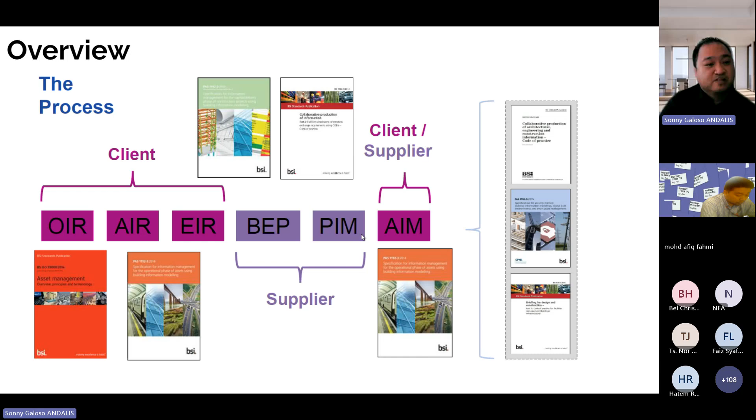So what I'm trying to say is that the client produces the following: the organization information requirements, the asset information requirements, and the EIR, the employer or exchange information requirement. If you look at BS 1192, it was called employer - the E stands for employer - but if you read the ISO 19650, the E stands for exchange. So you have to be careful about that, but they are interchangeable - it means the same thing.

So the consultants respond by creating a BIM execution plan if it's under BIM standards, a VDC execution plan if it's under VDC, or a digital delivery plan, a DDP, if it's under IDD standards. And you produce, as mentioned, the project information models and the asset information models. So that's basically the overview.

So what I'm trying to tell you, to get the gist of it, is the EIR is simply the tender specifications. And a BIM execution plan, or VDC execution plan, or digital delivery plan, is basically like a method statement - it explains how you are going to deliver a particular project specifically for a client's EIR.

The same is true for the asset information model. The actual deliverable is COBie or AIM or Asset Data Dictionary. COBie stands for Construction Operation Building Information Exchange. This is basically like a method statement - so it's a deliverable. That's the simple definition of the difference between an EIR and a BEP.

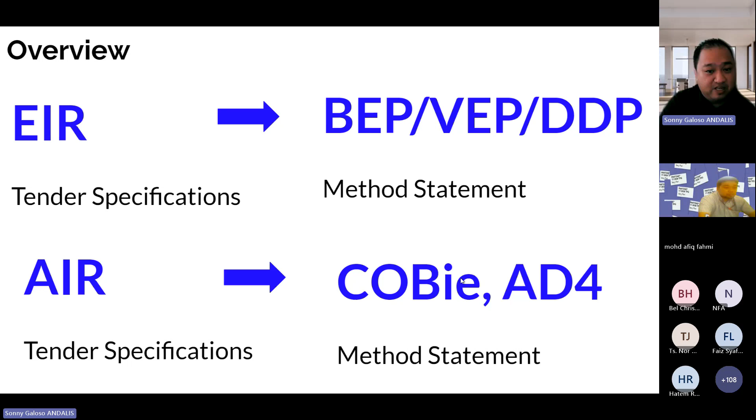So let's start - I have started the discussion to have a few definitions. The building information model or BIM, you have virtual design and construction, virtual building environment. And recently, if you read a few EIRs, they will talk about digital construction or integrated digital engineering - a lot of buzzwords.

But basically, the BEP is to demonstrate that the project stakeholders propose the approach, the capability, the capacity, and the competence to meet the EIR. That's all actually. It is assessed prior to the appointment of the project stakeholder, so even before you start the job, you have to submit your method statement.

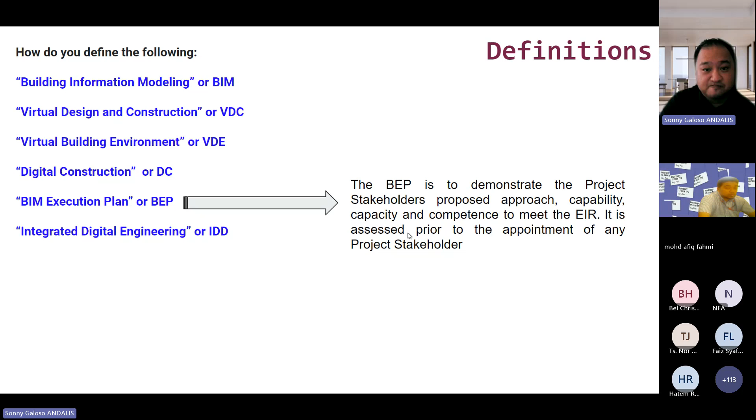That's all actually. So let's talk about BIM, building information model. So if you submit a BIM execution plan, what is expected of you - these are the skill sets. So the common ones are 3D modeling, 4D, 5D, model federation, clash check, and authority submission. So a BIM execution plan requires specific skill sets from the consultant, from the contractor, from the client or developer.

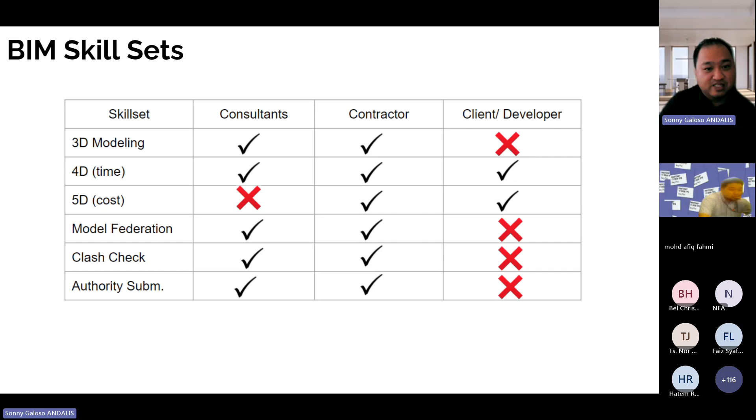Even the client and the developer must be able to demonstrate that they will be able to understand and use the models that you have prepared, or the BIM use case that you are proposing. Because there's no point creating something that nobody is actually using - it would be a white elephant.

These are basic, or ICE meetings, attended by engineers, architects, basically those people who have the capability to make decisions. You have virtual design models and virtual construction models, and discipline-specific information requirements. You have BIM to field, generative BIM or computational BIM, and as-built models.

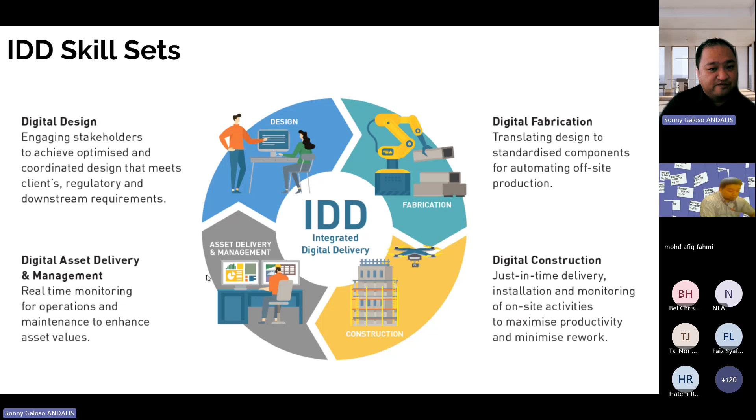When we talk about IDD, I think that's common in the market now. You have digital design, digital fabrication, digital construction, and digital asset delivery. You can read that on your own time, you'll have the slides. But what we're trying to do here is that IDD is actually a bit more complicated. These are the specific IDD skill sets, and if you notice, it's actually very different from the VDC skill set or the BIM skill sets.

You have digital design, which refers to the project information model, and digital fabrication, which the consultants and the contractor need to do. Common data environment, or CDE, is common now. You also have drones and laser scan.

This is actually to have a record of what is actually built on site. You have generative BIM and as-built BIM, which is the asset information model. You have standards where you can look at whether it's PAS, BS standards, or ISO. You have robotics now, which is quite a new thing—even in Singapore standards we're now starting to have that. You have digital asset, which is COBie. COBie is nothing new, but these are the general IDD skill sets to have.

I need to do that introduction for you to understand what exactly is a BIM execution plan. In reality, the BIM execution plan is an old, 10-year-old standard. This is already 2024, right? In Singapore, we started doing that in 2010, so it's about 14 years old already. So if you still call it a BIM execution plan, it's actually the very, very old one.

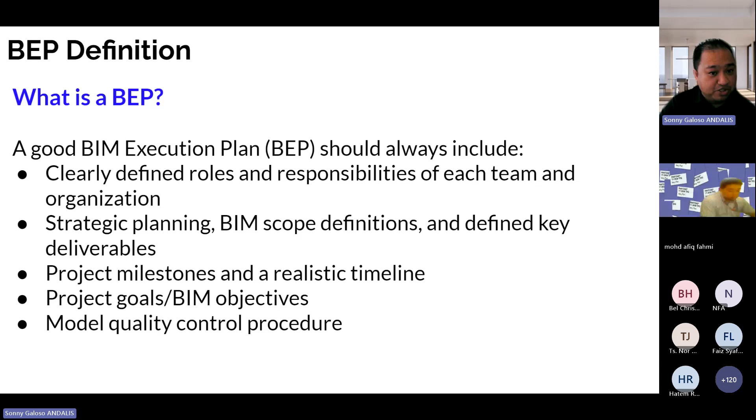It has to have clearly defined roles and responsibilities. You have to have strategic planning—what are you going to do across the number of years of your project, whether at the design stage, construction stage, or operation and maintenance. It must have key deliverables, project milestones and realistic timelines, project goals and BIM objectives, and model quality and control procedures. So these are common, these are the must-haves.

It also has PLQs. What do I mean by that? These are basically plain language questions. There's a tendency, if you are in BIM, to have a lot of acronyms. So the idea of a plain language question is to ask a question that is in plain language, with no acronym or whatever.

So you, as a BIM manager or as a client or as an engineer or an architect working on a project that has a BIM component, it asks you what steps to take to start a BIM project. That's a very simple, plain language question.

If not requesting all participants to migrate to BIM, what migration strategy would help you bring about that change? That's a very specific question. Let's say the main architect and the engineers are in BIM, but how about the specialist contractors—are they required to be on BIM as well, or can they do CAD as a specialist? So you focus on specific disciplines. What should be the aim of that specific single discipline?

There are projects wherein you are not talking about discipline anymore, you are talking about discipline groups. In one of my projects, we actually grouped one CSA—civil, structural, and architecture. Actually, the CSA, civil, structure, and architecture, is one group. We call it a discipline group, not more. It is actually a combination of three disciplines.

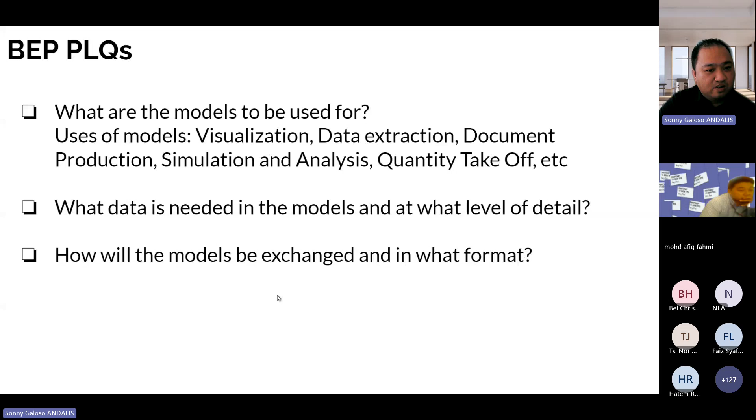You also have who is managing the project, the location of the project team participants, because on some big multinational projects, the scope of work—for example for the architects—they may be co-located elsewhere. They may be in the UK or the US. Your structural team is in Spain or Hong Kong, and your mechanical team is actually dispersed in the Middle East. So it depends.

If a particular company has a global design center, this can be a big problem. What risks are involved? So what I'm trying to say is that there's a specific need to write a BIM execution plan.

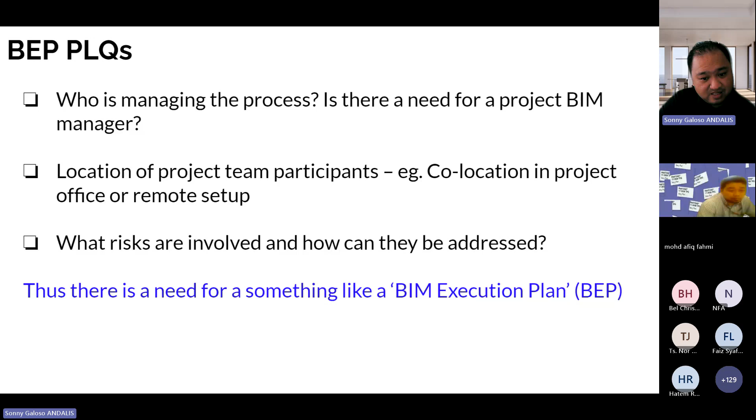These are the early adopters I mentioned about, basically from the US—obviously Indiana University and the Los Angeles colleges. These execution plans, if you notice, are from 2009 and 2010. They are the first adopters of what a BIM execution plan is.

If you actually look at this early BIM execution plan, you would understand that there's a proposed strategy. Strategy is very, very important in utilizing BIM during the design stage. And then the second purpose of this execution plan is what is the strategy during the construction stage?

So you have obviously a design stage. This can be in terms of months or even years. In my project currently, we are designing it for the last 4 years, still designing it—we are still at the design stage. Construction stage is obviously very long.

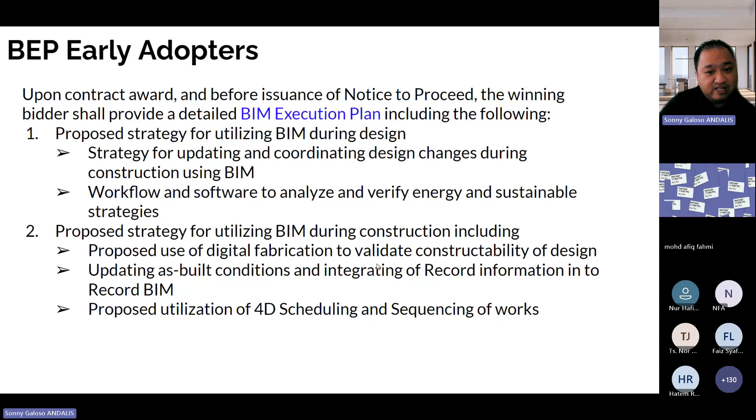So the version of the software and the file formats are changing. You may have started in Revit 2020, but now it's 2024. Are you using still version 2020 or are you using version 2024? So what is your strategy? What is your soft landings? These are the things, these are the questions that you need to answer.

I mentioned about the software to be used, the file formats, the exchange protocol—we will discuss that in detail later—and the project team qualifications. And then, is it specific?

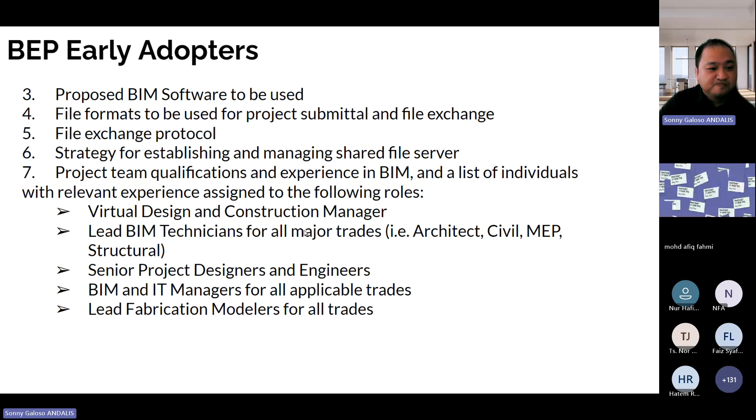This particular question is US specific. They're talking about virtual design and construction manager. In the US, there's a difference between virtual design manager and virtual construction manager. So there's a big difference with the VDC workflow as compared to the Asian BIM execution plan. This is basically what the early adopters are talking about.

The next one to discuss is roles and responsibilities. This is a sample of our roles and responsibilities. This is normally done on a table or an Excel spreadsheet. If you actually go to the early adopters in 2009 and 2010, you would actually see this.

We are still doing this actually, even if you have a VDC or an IPD project. We are still producing roles and responsibilities because it is actually necessary to see who is doing what and who is supposed to create and generate what kind of documents or models for a specific project.

You have milestones as well and deliverables. If you notice, there's a conceptualization stage, schematic stage, design development, all the way to construction document. Even in 2009 and 2010, at the DD stage or design development stage, you have architectural model, energy model, structural models, cost estimate, and a discipline collision report.

There's even COBie, which is actually quite popular in the US since 2010. COBie is basically a data exchange format between the modeling stage and the facility management stage. That's quite important especially if you are doing government buildings in the US.

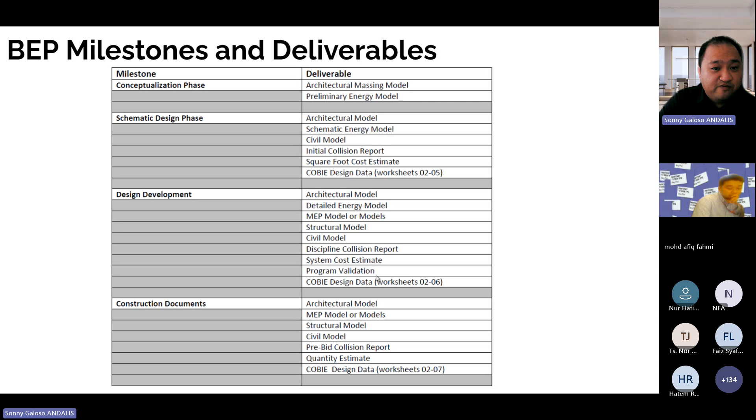So these are the deliverables if you are actually creating a BIM execution plan in the early 2010s.

So I mentioned about mandatory contents. When you talk about BIM execution plan, the mandatory contents, there are only 5. Number 1, you have a project initiation and description. You have to have a modeling plan. You have to have an analysis plan.

Actually, a lot of people are deleting the analysis plan, just jumping to collaboration. But analysis is actually quite interesting—the engineers and architects must be using the models for analysis. There's also a collaboration plan and a quality control plan. So these are the mandatory components if you are implementing a BIM execution plan.

What do you mean by that? So how about project information? You have the owner, the project name, the location and address, and the description. Then as part of that, you discuss the goals—review, decision support, analysis, coordination, clash detection, and QA/QC.

So these are the modeling goals—what are you going to use the model for? This is the first important component if you are creating a BIM execution plan.

The project goals, if you go by this—these are the common ones—is to have a fully coordinated and assembled model. You have separate models in the original authoring software. You have project data, whether schedules, drawings, or facility management data under COBie, and your 2D deliverables, whether proprietary like DWG or DGN, or neutral like PDF.

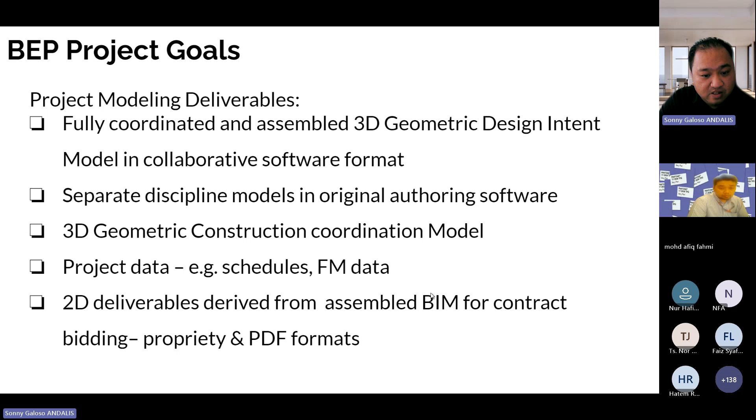So these are considered lightweight files. And then you need to have the project uses of your BIM at the plan, design, construct, and operation stage. These are typical ones.

As mentioned, this is the project goals even before creating BIM execution plans in the early 2010s. So you have your existing conditions modeling. Now there's a lot of emphasis on laser scanning and point clouds. Before, the existing conditions modeling was done manually, but now you have laser scanners to import point clouds there.

And then you have your analysis, whether structural, lighting, mechanical, and other. This is LEED—in the Singapore context, we have Green Mark. I don't know about Malaysia. And then we have code validation.

If you have heard, in Singapore we are transitioning to model-based code checking, so we are reviewing models without people there—they're actually reviewed by computer programs. And then you go all the way to record models, which is the as-built models, and so on and so forth.

So what I'm trying to emphasize here, for example in the operation stage, is that if you are creating models specifically to be given to the client or the developer or whoever will be managing the project, it is very important to focus on asset management.

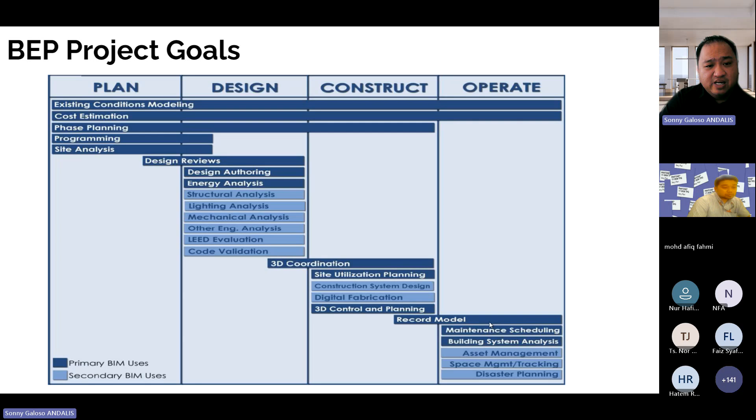Project goals—so I mentioned one of the BIM execution plan project goals is to identify the value and risk for each of the BIM uses, whether high, medium, or low. You identify the responsible parties, the rate, and the capabilities of each party. This is important in terms of resources, competency, and experience.

So in our projects, when we review BIM execution plans, we actually grade them depending on their competency and experience, because a lot of projects are not similar. So every project is different.

So you have to grade and assess their capability in terms of this—for each BIM use, rate their capabilities for each particular BIM use.

In terms of project team, whether it's a small project or a big project, you always have BIM managers, or in the current context, digital delivery managers. You also have coordinators between disciplines, and you also have modelers. So it's important to actually put in the responsibilities of each of them.

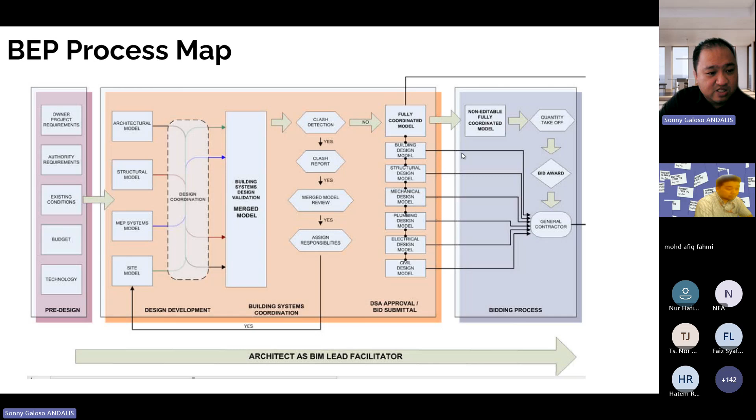So you have specific models. What are they going to be? How are they going to be federated? And who will be doing the quality assurance and quality control? These are specifically process maps required in a BIM execution plan.

This is just a continuation—this is the left side, under design. During construction it's much more complicated because you need to provide models coming from subcontractors and then federate or consolidate them. A consolidated model is the same as a federated model.

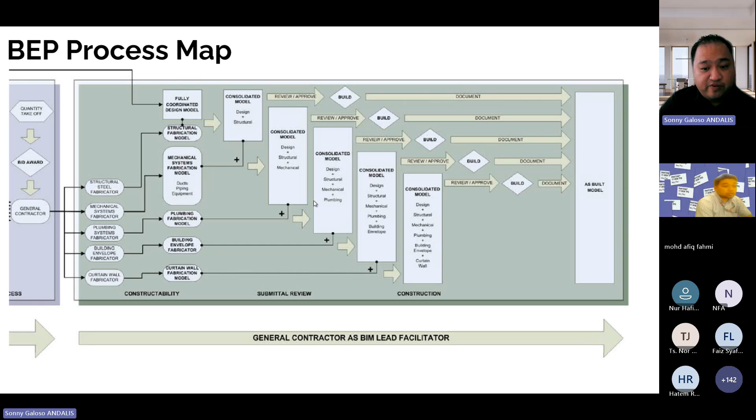How are you going to federate that for submission to the client, for submission to the authority, and for submission to the engineers and architects? You have to be very specific on how you are going to federate or combine your models. This is another example of a process map, quite old already, but this is from the initial stages of BIM execution plans in the early 2010s.

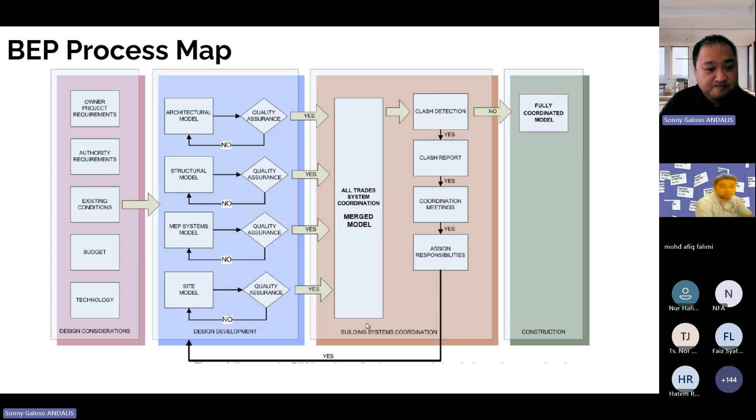Another important feature of a BIM execution plan is your modeling plan. For example, the architect, the civil engineer, the structural engineer, the mechanical engineer—what exactly are they going to do, and what particular authoring software are they going to use? That is important.

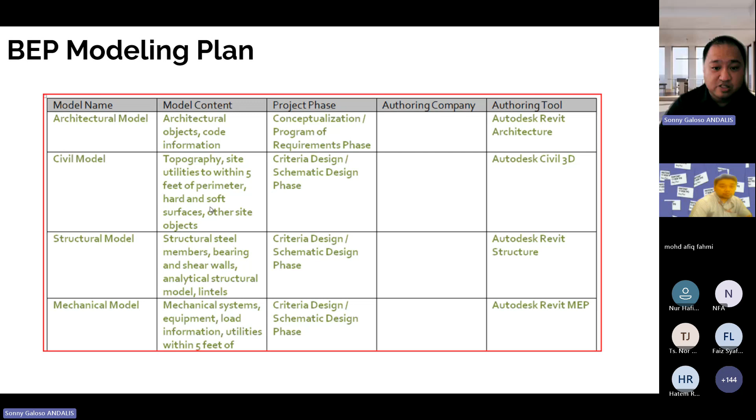In the Singapore context, this was actually published in 2010, so it's quite old. At the time, we required site models, architectural elements from the architectural models, structural elements with load-bearing elements like foundation, beams, columns, and so on, and civil elements.

At the early stages of BIM execution plans, from the early 2010s to 2015, you have digital terrain models, required to see the existing condition. You have geology reports—even at the time we were doing AGS format already. You can import that into Seequent, gINT, or Civil 3D. You also have utilities models.

Rain and stormwater—this is actually specific for infrastructure projects. You have underground public utilities and others. So this was quite common already in the early 2010s, in most BIM execution plans.

If you notice, there's a distinct difference between a building project and an infrastructure project. A building project has the typical architectural, structural, and mechanical BIM elements. An infrastructure project has a lot more civil BIM elements—not quite common, but very necessary for infrastructure projects—and you must have the capability to model them in 3D.

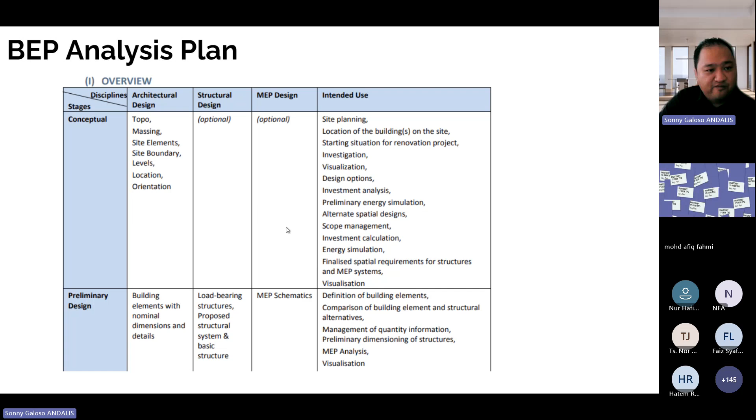Going down to the project stages—detailed design, construction, and as-built—you would have another form of this, a table for your analysis plan, specifying what you are going to use it for. That is a typical one.

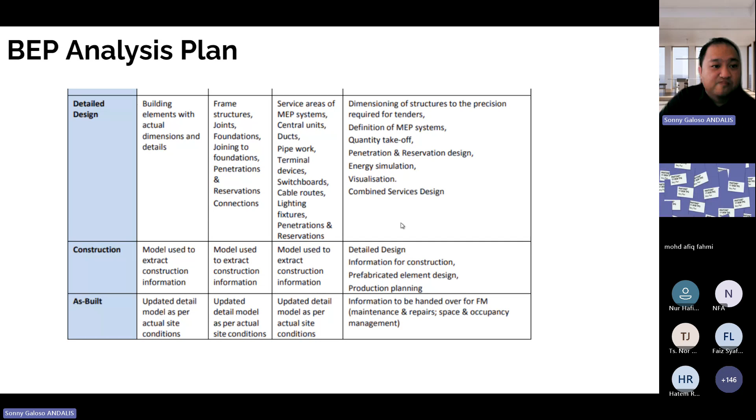How often? Is it weekly, fortnightly, or monthly? It depends on the project, on the complexity of the project. You also have your information exchange. I will discuss this later with an example, but this is basically what the architect produces and how the structural engineer will consume it, or how the mechanical engineer will consume, for example, the structural models. So you have to be very specific on that.

And then it comes with quality assurance and quality control. You have four different types. The first one is a visual check - most BIM managers will do a visual check. You have an interference check between two components, whether they're clashing, soft or hard - that's called an interference check. You have a standards check - basically, is it following a particular standard? Your dimensions, your line style, your levels, your layers, and so on. And then your model integrity check.

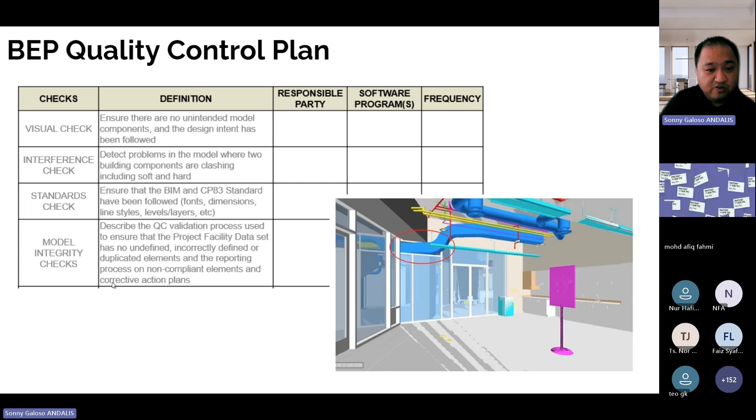Recently in Singapore, as mentioned, we are in the process of migrating to CoreNetX, wherein the validation of models is done by computers. So in the Singapore context this will be fully automated, but in other parts of Asia, for example, this is still actually done manually.

So I mentioned about the must-have and optional items for the BIM execution plan. I would like to give you best practices from the projects that we have done for quite some time, for the last 10 years. I mentioned about identifying BIM goals and uses.

This should be attended by your senior management and BIM management staff, including the owner, the designer, the contractors, and the key subcontractors. You have a design BIM execution plan, attended by the owner, the BIM managers, and the project managers of the project. And then you have to develop your information exchanges, and you have to review your final BIM execution plan, and it has to be attended by all parties that are involved.

Another best practice is monitoring progress against the BIM execution plan. For example, on a monthly basis, we discuss the progress of the project and address any implementation challenges. I have to note that a BIM execution plan is not a fixed document. On some of our projects, we actually edit the BIM execution plan on a monthly basis.

We resubmit it because it's a method statement, right? And if the method statement is not workable, we have to tell the client or the architect or the engineer that we will do it differently the following week, the following month, for example. So it's not a fixed document - you have to continuously modify it, as mentioned.

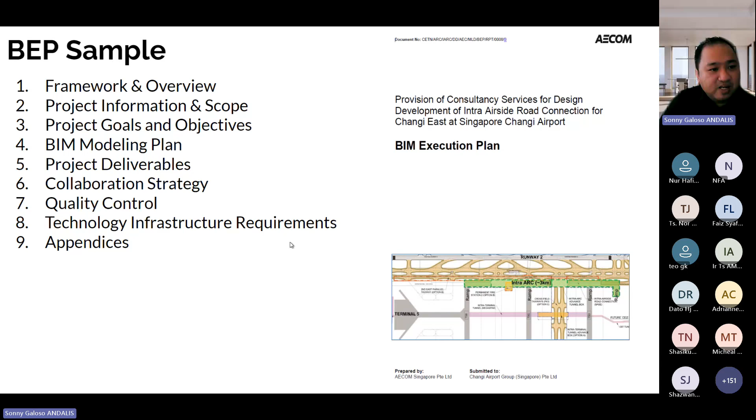So these are the typical components of a BIM execution plan. That's basically the end of the BIM execution plan.

I will be discussing the employer or exchange information requirements, because this affects the BIM execution plan. If you notice, with the publication of BS 1192, the British Standard 1192, and then ISO 19650, the BIM execution plan actually changes now. That's why the topic of this presentation is the evolution, because the EIR is responsible for that change.

So let's discuss exactly what an EIR is. An EIR is simply an employer's information requirement or an exchange information requirement that forms part of the appointment and tender documents on a BIM project, to enable the supplier - the consultants or the contractor, as I mentioned - to produce their initial BIM execution plan.

There are a lot of updates now on what an EIR is. EIR can sometimes be very, very thick - I've seen an EIR that was about 550 pages long. So the BIM execution plan also changes. As mentioned, the BIM execution plan is just a method statement generated in response to the employer information requirements or exchange information requirements. It's a pre-tender document that sets out the information to be delivered, the standards and processes the supplier should adopt during the project delivery process. This is the main reason why BIM execution plans are evolving, because the EIR is also evolving.

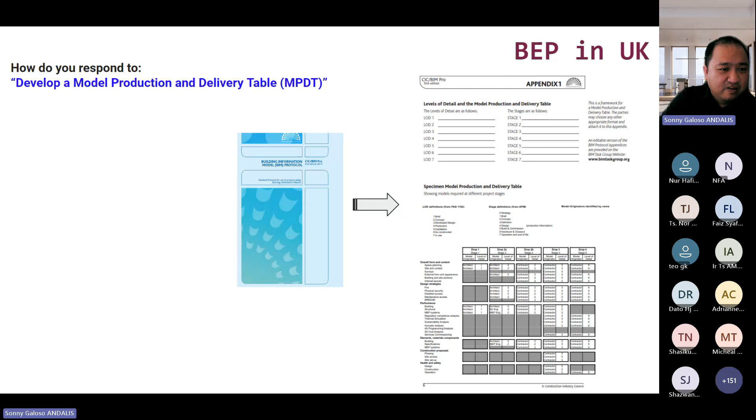So I mentioned the TIDP, the task information delivery plan, which is the individual delivery plan per discipline. The compilation of all your TIDPs is actually the model production and delivery table—that's the master table, with individual TIDPs within it. Every discipline, subconsultant, or subcontractor will produce this per deliverable, and then they are summarized into a model production and delivery table.

So how are you going to respond to, for example, supplier capability statements? These are the plain language questions I mentioned at the start of the presentation, and you have to answer that using your BIM execution plan. There is now a trend where specifications or employer requirements are written in simple language to avoid misinterpretation of requirements. It has to be written in simple English that can be understood by the modeler, the coordinator, the BIM manager, and so on.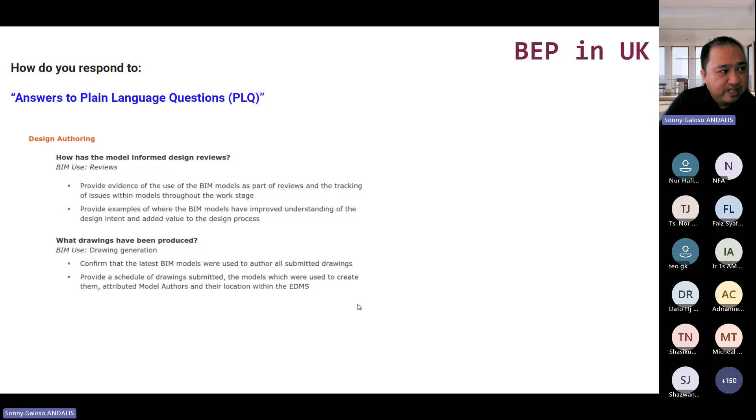COBie is a completely different topic. A lot of BIM execution plans need to handle COBie. For me, COBie is actually very simple—I'll give you an analogy. COBie is like a recipe for a chocolate cake; it will not be a chocolate cake if it doesn't involve chocolate. That's the one thing I'd like to emphasize: COBie is a standard. If you pick and choose the components of COBie, it's no longer COBie. I hope you understand what I'm trying to say—COBie is a standard, so you either adopt it as a whole. You cannot pick and choose, because if you do, that becomes your own standard. You can put a name to it, like a Malaysian standard, or a Singapore standard, or a Thailand standard, but it's no longer COBie.

COBie is a complete standard. Okay, I mentioned about the MIDP.

This is a typical picture of an MIDP that is now part of BIM execution plans. This particular MIDP is actually coming from the Scottish Futures Trust, which is the Scottish BIM requirements in the UK. There will be requirements like it should be aligned to UK BIM level 1. So this is actually BIM level 1.

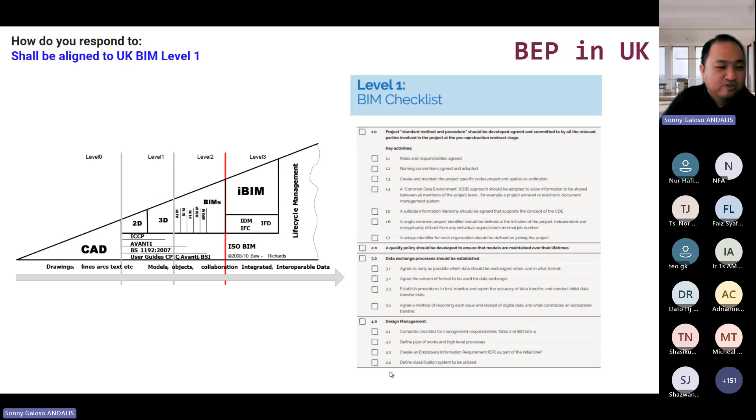So the BIM execution plan now actually responds to this. It is primarily dependent on which particular consultant are following, for example, the UK standards or the Singapore standards, and so on. So you have a specific checklist that you need to conform to. That's the reason why BIM execution plans now are quite long.

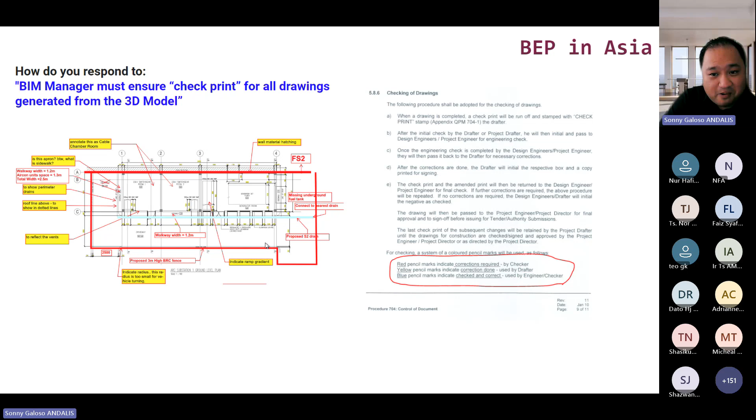And this is actually the last one. The BIM manager must ensure the checkprint for all drawings should be generated from BIM. These are funny standards that I encounter in one of my projects. So you have checkprints for all of your drawings that is actually generated from BIM. How are you going to do that? And how are you going to prove that you're actually doing that?

You have something like this. This is a typical checklist for a BIM execution plan in Asia. This is actually true if it's in Hong Kong, in Malaysia, and in Singapore. So this is a typical execution plan template, and it's now changing. In Hong Kong in particular, they have their own standards. So for people who are listening in Hong Kong, the Construction Industry Council has their own execution plan, and they have a particular standard or a template for you to fill up or to use for a specific project in Hong Kong.

So, for example, this is how you're going to respond to this: the contractor shall follow the timeline for this particular BIM execution plan. So what I'm trying to say here is that there's no such thing as a final version of the BEP. There's actually a lot of revisions. So if you have new lessons learned, you have developed a new process, and you're adopting a new technology, the BIM execution plan is actually a live document. You have to update it.

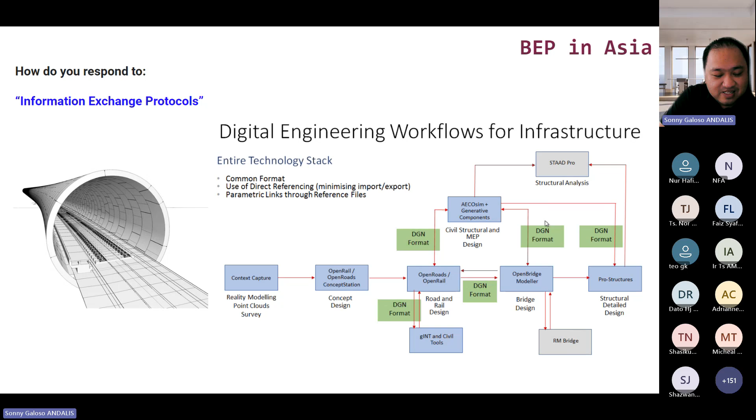The information exchange workflows, these are actually changing now. This is a typical one for one of my projects. The entire technology stack is actually described here. So now you have engineering workflows for infrastructure projects, how the models are going to be federated and so on, how they're going to be checked for quality assurance and quality control. Are you using structural analysis, for example, in your models? Yeah, that can be done as well. So this is what we call information exchange protocols.

And then I think this is the last one. The funny thing is there is this requirement. This is just a screen capture of one of the requirements. It says progress payment is using quantities extracted from BIM. Actually, in one of my projects, this is quite clear: the quantities that are paid to the contractor are actually dependent on the model. So if you don't model it, you will not get paid. So that is the funny one.

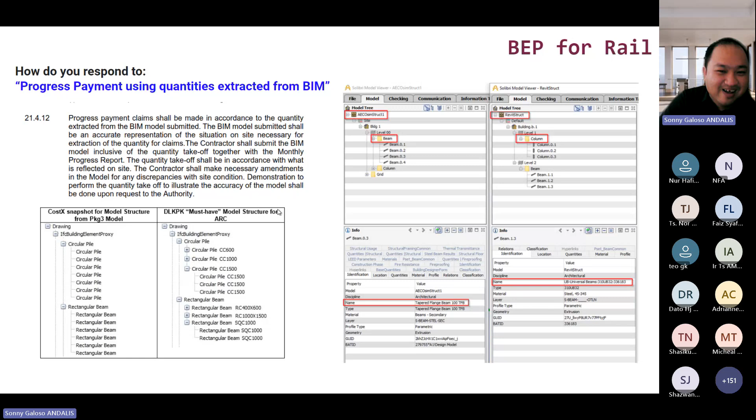So you have hyper accurate models because you are responding. The progress payment is actually quite dependent on the quantities that are generated from the models. So that is an exciting new evolution because you are forced to model it. Otherwise, you will not get paid. So that is something that is quite new. And then this is actually a real project that I have done quite some time.

So to put it into summary, I'm sorry, I'm already out of time, it's been an hour already. So BIM execution plans shall be written in plain language, plain language questions that can be understood by modelers, coordinators, managers, and most especially the client. A BIM execution plan is simply a method statement that responds to a specification, what we call an EIR, or an employer information requirement.

It has to be constantly updated as new project team members join, as you have site restrictions discovered, and as you have new BIM regulations, because this is dependent on the country. If they have introduced a new BIM regulation, you have to respond to that or cover it. And if the client requirements change, for projects that are quite big, multi-year, the client requirements actually change. So as the client requires another deliverable, you have to update your execution plan as well.

I keep mentioning that facility management must not be an afterthought and shall be considered as early as detailed design, and taken seriously during construction. Because, as mentioned, you must not deliver your asset information model at the end of the project.

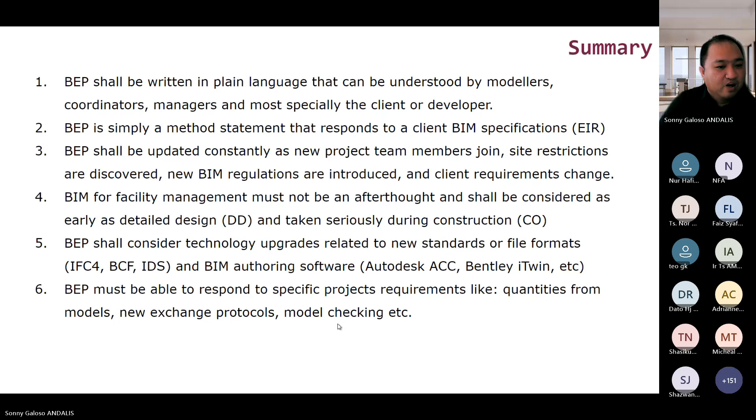Okay, I hope that you learned something. We can have our Q&A now.

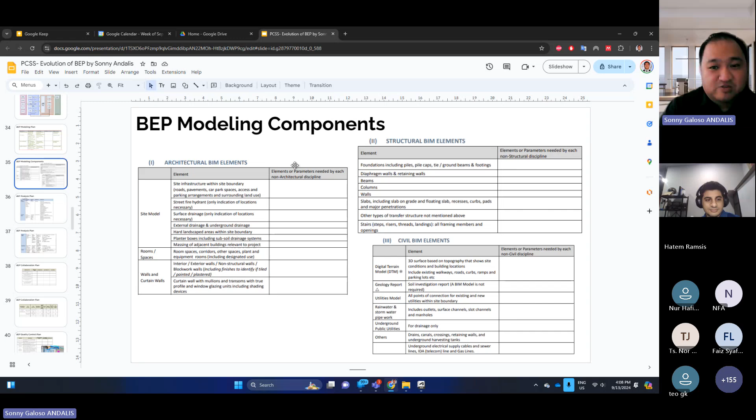Let me go back to the slides, because I think I described it there. Can you still see my slides? Give me a moment. Sorry, this one—can you see this? To answer your question, architecture and structure are typical building projects. The objects, families, cells, whatever you want to call them—the elements—are mostly described here: architectural, structural, and civil.

If you talk about infrastructure projects, like flood control that he mentioned, this talks about civil BIM elements. You notice here, you have rainwater and stormwater pipeworks. You would not normally need that for a typical building project. But for an infrastructure project, you would need things like outlets, surface channels, manholes, and so on. You need a geology report, a utilities model, and a digital terrain model. This is not something building projects would normally need—they would need it, but only as a very small component.

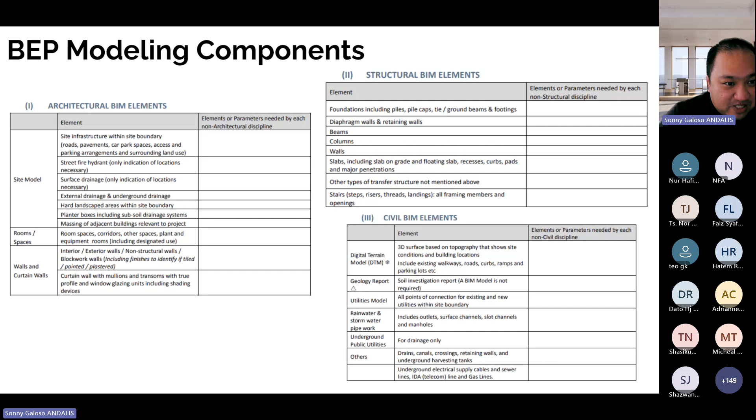But for infrastructure projects—and regarding the question, I actually currently have two dam projects in the Philippines—these are the components we have in our model. Quite different from if I'm just doing building projects. In Singapore there's actually a big BIM infrastructure plan in place. I hope I answered the question.

Okay, let's go ahead with another one from Shafani Jack. How should a BIM manager approach the challenge of aligning BEP requirements with varying international standards and regulations, especially when managing projects with multinational teams and diverse regulatory landscapes?

As mentioned before, before you even start to create your BIM execution plan, you have to be mindful of the employer requirements. Sometimes, let's say I'm a developer creating a condominium project with 10 towers—that's a big project. And I hire an American architect and a UK-based engineer. Those are two conflicting standards already, and then you also have Malaysian standards.

So the architect will write their requirements based on US standards, and then your engineer will be writing something based on the UK standards, the one I showed you before in the presentation, and then you have local regulations in Malaysia. So you must read all of these requirements, combine them, and then deconflict them. It cannot be that the architect is saying one thing and the engineer requirement is another story, a complete conflict with one another.

Thank you. And before we conclude our session for today, it's tradition around here to take a group photo at the end of every webinar. So while we can't physically gather, we can still create a memorable snapshot together. So kindly turn on your webcams, no pants necessary, and we will take a group photo. Okay, let's get a few more people, don't be shy guys. Okay, we're taking our snapshot in 3, 2, 1.